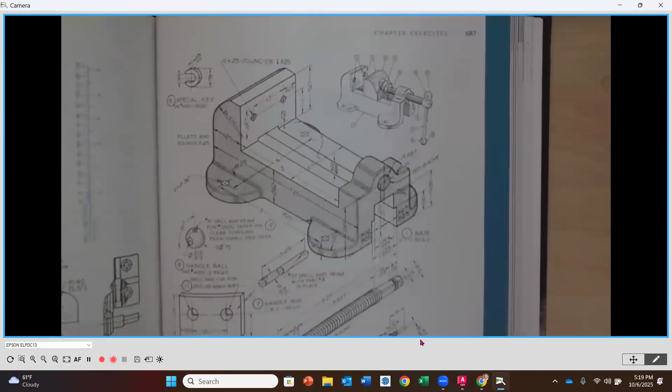And what we see here is kind of a pictorial of the full assembly up in this upper right-hand corner, and then all of the individual part details for each one of these here. Now you'll notice that this is all in isometric view, okay? And what you were tasked with last week in assignment 7A and 7B was making the detailed drawings for all of the individual parts here, okay? Using the dimensions that were here, but then also I had drawing guides for you to work through. And really kind of going off of those drawing guides to create the 3 views, the standard orthographically projected with good dimensioning for each one of those.

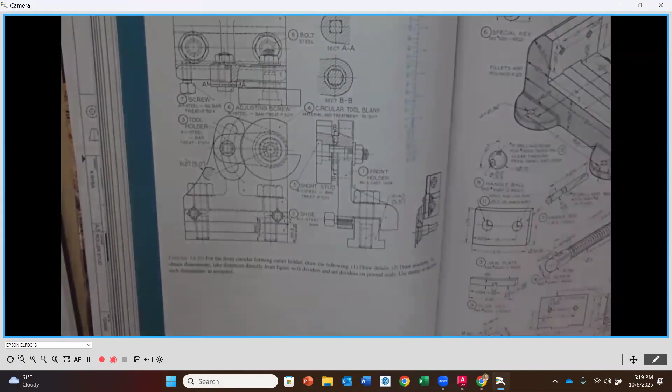So kind of peeking back at Module 7 and looking at assignment 7A and 7B, just reminding us of those individual parts. So the first part of this project would be completing those 2 assignments. So this is assignment 7A. There are 4 of the parts from that assembly in here. And if you click on any one of these PDFs, for instance, this is going to be the drawing guide. So you want to duplicate what you see here, making sure you're using the appropriate drawing border to the right scale, and then adding the dimensions to the part, drawing up the part, okay? And then doing the very same for the additional parts that are in here.

By the time you get done with the 2 assignments, you'll have 8 parts drawn, dimensioned, and on borders, okay? They're the individual items, okay? So once you have that done, then we go to the assembly drawing. So like I said, if you're not quite there yet, that's okay. I'm still going to do the demonstration tonight so that when you get there, you have some direction here.

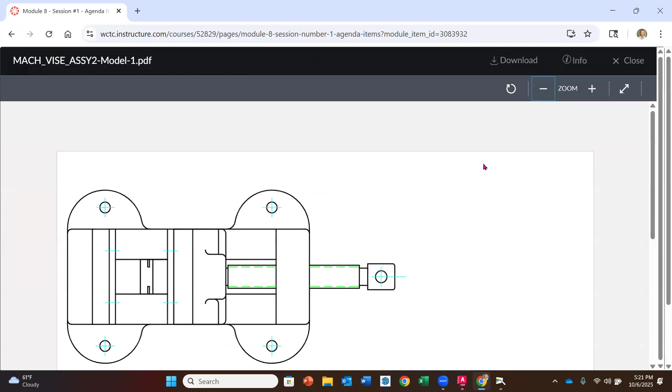So if we look at our agenda, first things first, you're going to use that page 687 in our textbook to kind of see those details. You'll also notice there are 2 other items here in PDF form, okay? The first one, this is kind of a larger view. I'm going to zoom out just a little bit of the 3 views of the assembly that you're going to create. This doesn't have the balloons on. This doesn't have the drawing border on. It doesn't have the bill of material. And I did that on purpose so that you could kind of see the parts a little bit better on here.

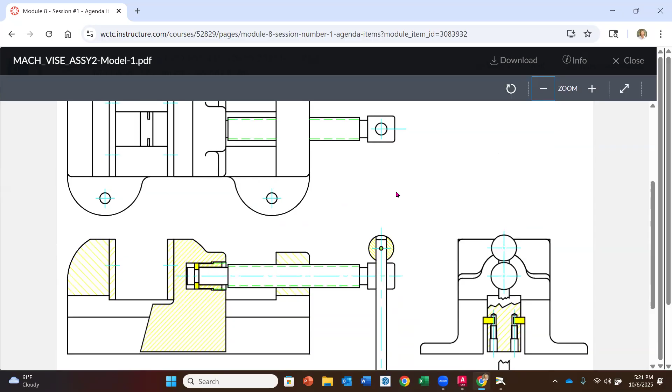I also kept this as color so that you could really differentiate from part to part to part. Okay. So this is something for you, for reference. I did print this off in the classroom in hard copy form, so you guys have that if you happen to be here, but for those who are virtual, this is just a nice close-up view of the 3 views that you're going to be creating. So if you need to zoom in, I think it's a little bit easier to look at this one.

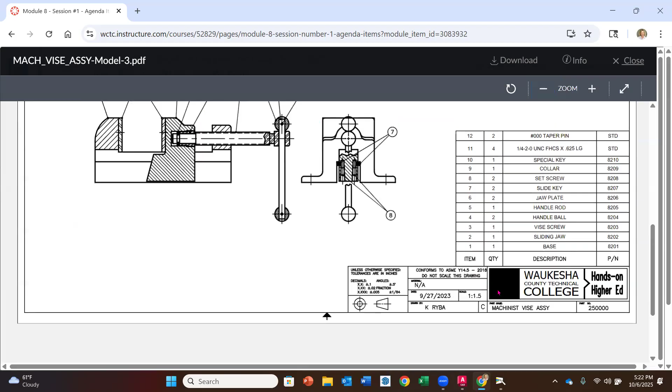The other one that we have here, the second PDF, this is the actual drawing guide for the final assembly. Okay, so this one is those very same 3 views, but now you'll notice that we have the balloons on, we have the bill of material over here, we've got the drawing border on, so that, like I said, if I try to zoom in on this, yes, you can, but it's a little bit grainier. It's a little bit harder to see the details. So that's why I have both versions. So that's what you see here in the agenda item.

And I'm going to show you how to get started on that, pull the borders in, give us some reminders, show you how to get the bill of material in place and balloons and all that kind of stuff. And then it says here, you're going to see the demo, use the parts drawn from assignments 7A and 7B. So again, if you don't have those done, that's okay. Just sit back and watch what I do tonight.

And then you're going to be submitting the PDF of the final assembly here. There's only one item that you're going to be handing in for module 8, and that's just the final assembly. That's it. Okay. And it's going to be based on that drawing guide. So it's going to be on a C-size border. You're going to balloon, you're going to section as needed. You're going to add the bill of material, and you're going to fill in the title block.

Okay. The assembly always goes faster than the details. The details are the slow you down stuff. And so the assembly, you're going to find, is going to go relatively quickly compared to all the individual details. So let's get started on this. I'm going to show you the process that you're going to go through and the items that you have to keep in mind as you go along that path.

So what I've done is I've already pulled open AutoCAD. All of my detailed drawings have English units or inch units, okay? So I opened up my WCTC inch template to get started here. And you'll notice that the generic drawing1.dwg is here. So that's where we start. Then what I'm going to do now is pull in the individual parts at a 1-to-1 scale, and then we're going to place the views that we need for each one of our parts, just like we did for that small assembly in the practice problems for module 7.

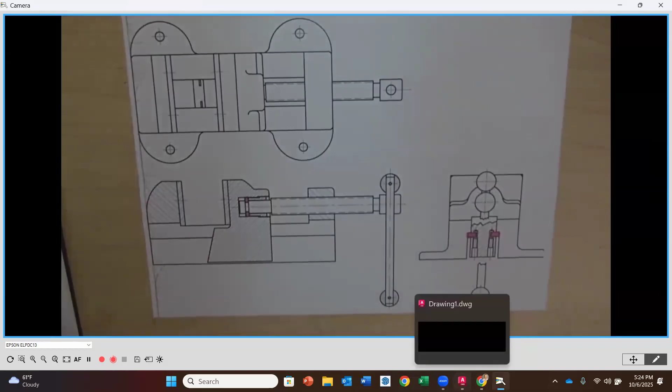So I'm going to go back over to AutoCAD, and just like I would for any part that I'm going to bring in, I'm going to go over to the Insert tab, and I am going to insert from block libraries. And I'm actually going to put the chat away for a little bit. Then over here, I'm going to arrow down and say browse block libraries. Now I'm going to go to the directory where I had saved all of my drawings for this project.

So depending on where you have your stuff, I have mine in my tech drafting, and then I usually go to module assignments. I have module 8. I have all the drawings in there. So you might have them in module 7, the detailed drawings, and then you're going to have the base. So I'm going to pull in the base.

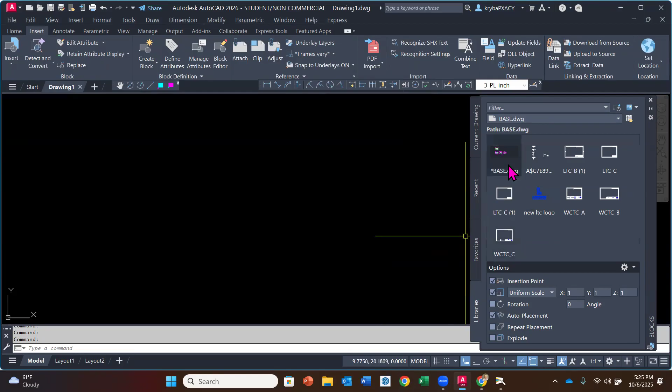Now this base is going to be dimensioned. It's going to be on a drawing border, and that's totally fine. We're going to bring that all in. Now you'll notice that it populates right here, and I'm going to left click, and I'm going to bring this in. Okay. Now, when I bring it in, remember it's a click, click, not a click and drag. I'm just going to place it anywhere on the screen, left click.

And then now it's asking me, what's the scale you want to bring this in at? So if you look down at your command line, it has 1 in the brackets. You can either input 1 or just hit enter, because that's usually what it thinks you're going to do. But if you want to bring it in at 2 times or 3 times... but remember, individual parts are always drawn 1-to-1, and we bring them in 1-to-1. Okay. We adjust the border around it, and we adjust the text size. Okay. But we always draw 1-to-1. So we want this in here as 1-to-1.

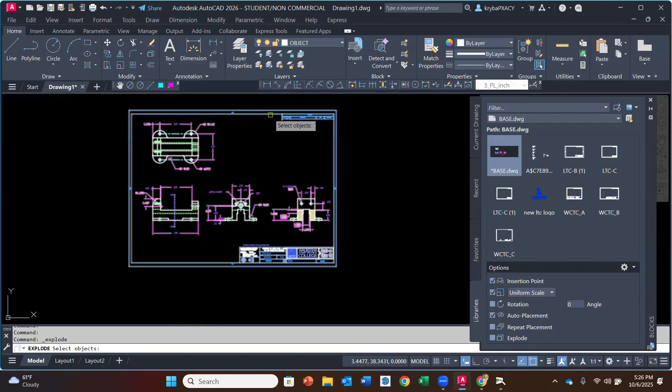Now what we want to do, first things first, if I go over the top of this, this is all one item. It brings it in as a single block, okay? We first need to explode that. So we're gonna go back to the home ribbon, and underneath our erase, we're going to click on explode, and we're just gonna select any line, and we're gonna hit enter. And now we have individual pieces. Our border will still be the same, but that's okay. Each dimension is separate and such.

Now, I'm going to go back to the drawing guide. So what you want to look at here is, what are the views that I want to save and use? And what are the things that I want to get rid of? Okay. So I'm going to do just the right side view because I just want this outside. I'm going to do the front view and the top view. That section view I'm going to get rid of. And then all of the dimensions and the border. So the section view we're going to get rid of, but we're going to keep these three right here, front, top, and right side.

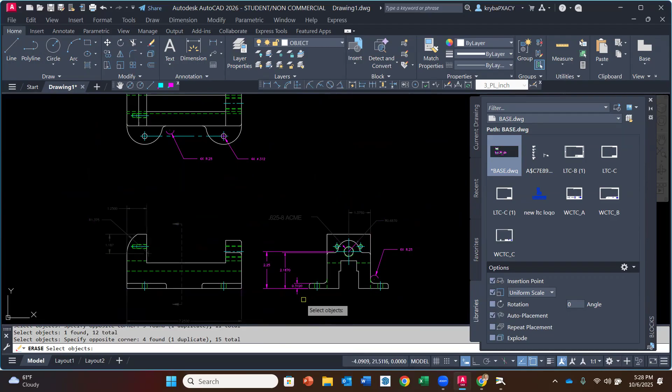So I'm going to zoom out a little bit. I'm going to go to erase, and I'm going to kind of strategically get rid of the things that I don't want. I also like to delete the dimensions. You could hide the dimensions if you want, but remember, then in this file, you're always saving information that you're not going to reference. So I do like to get rid of it. So I'm going to take the time to delete all of this stuff. I can't do two things at once. There we go. Oops, a little bit more. Okay. So it looks like I've got a couple little residuals here. Get rid of those. And I think for the most part, I've got my three views here.

So now that I've got this in, I'm going to do a file, save as. Just keep saving as often as you can, you don't want to lose what you have. And I'm going to go to my OneDrive, mechanical design, tech drafting. There we go. And I'm going to call this machine vise assembly. And I think this is like number 3 at this point. There we go. Okay, so this is my start.

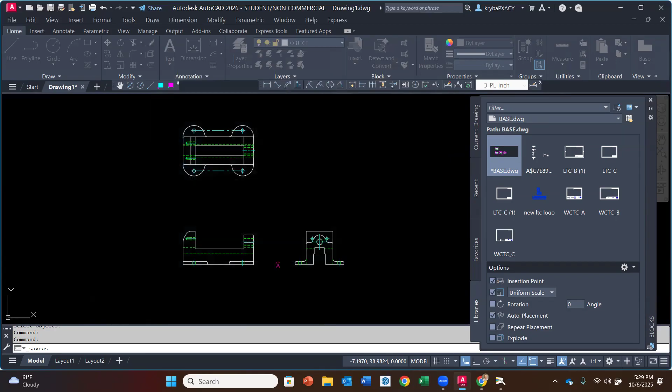All right. Now what I want to do is go back and compare here. What are the things that I need or don't need? So as we look in the right side view here, we're going to be putting our sliding jaw in place. So when I look in this direction, I am not going to see the 2 holes that are here. So you'll notice that we don't see those in that view. So I'm going to get rid of those right away. And then any hidden lines for the most part. I am going to be switching a couple of these to visible lines so that I can use those.

But in an assembly drawing, we leave out the hidden lines and most of the center lines too. Again, we just want to show the items so that we can balloon to them or show where they're at. So in this view right here, I am going to get rid of the hidden lines that I see in this view.

I'm in the right side view right now. I'm going to get rid of this line. Oh, this one's a solid, yep, in this view. I'm going to get rid of the two holes here because that's going to be a different part, and then get rid of these two right here and right here. Some of these are going to convert.

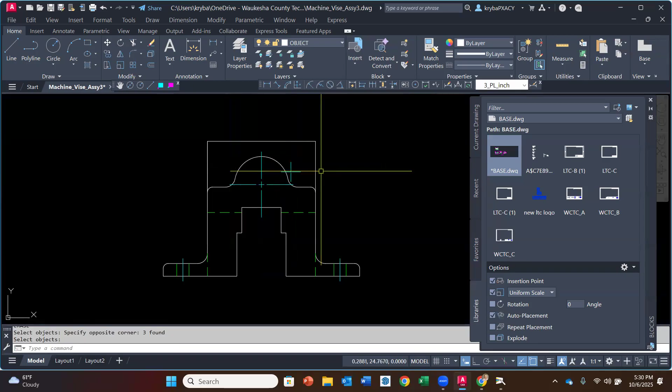So we're just going to clean up where we need to. And then this line and this line go to solid.

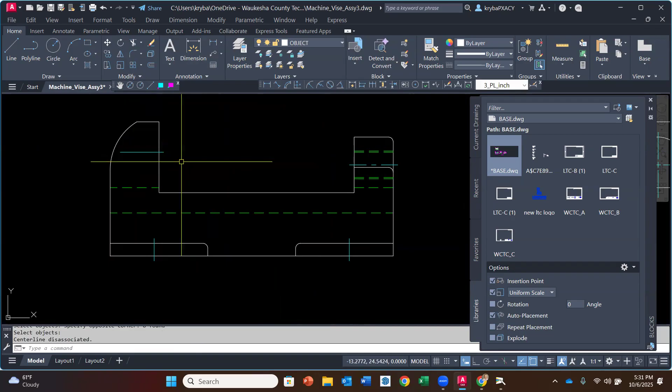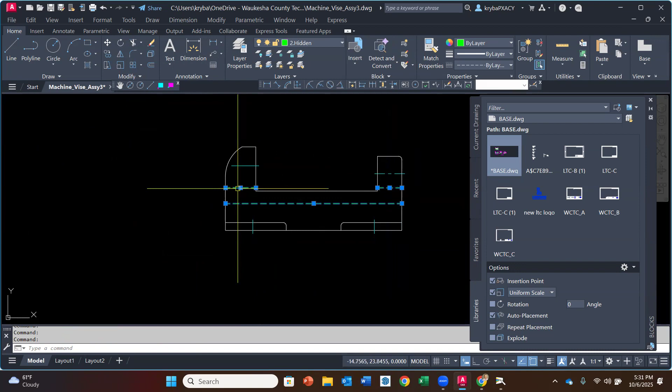And then we're going to do the same thing over in the other view. Any of our hidden lines, we're either going to get rid of, or we are going to convert to being solid. This hidden line for the tapped hole, we're going to get rid of that one, and then over here as well. I am going to keep the center line. This one is not going to be seen because we do a section view, as we can see on top. And then this one goes to, these three go to object lines, okay?

And then we do the same thing in the top. So I'm going to get rid of these two center lines, get rid of hidden lines, this one, and over here.

Once we get rid of what we don't need, you'll notice it starts to look kind of generic. And that's good, because if we kept all of the hidden lines and all the little individual things, it starts to just look like a bunch of black lines because they go over the top of each other and it's too much.

So this is going to be our first part. I'm going to do a quick file save. If I'm forgetting anything, remember, always reference back to here. This is your final, so if in my lecture here I forget one or two things, this is what you're going to be working off of.

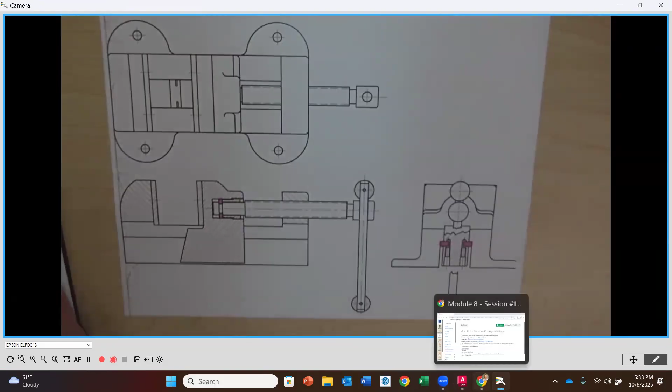Okay, so I believe I'm pretty good on my base right now. Then the next part that I'm going to bring in is going to be my sliding jaw. So I'm going to go back to AutoCAD. I still have my dialog box open for the insert, so I can just arrow down and go to Browse Block Libraries, and it should bring up that same directory that I had gotten my other items out of. And this is going to be the sliding jaw, okay, the sliding jaw.

So I'm going to open that up. It's going to populate here. I'm going to left click and pull it in. Again, I'm just going to kind of fit it right here. This is going to be a scale of 1 to 1.

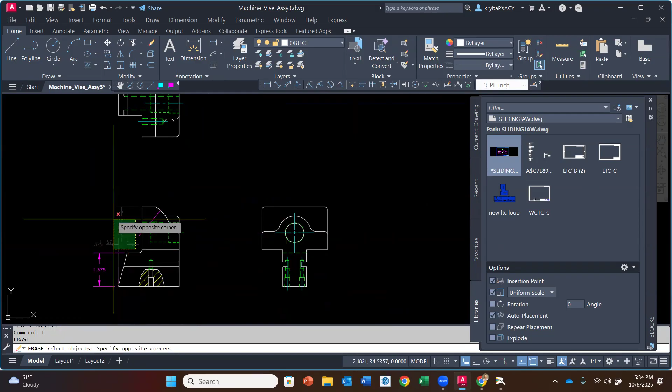And then now I am going to explode and get rid of what I don't need. So I'm going to get rid of my border, any dimensions, the section view. I'm going to keep my top view, but I'm going to get rid of all of my dimensions. Do a quick save. All right.

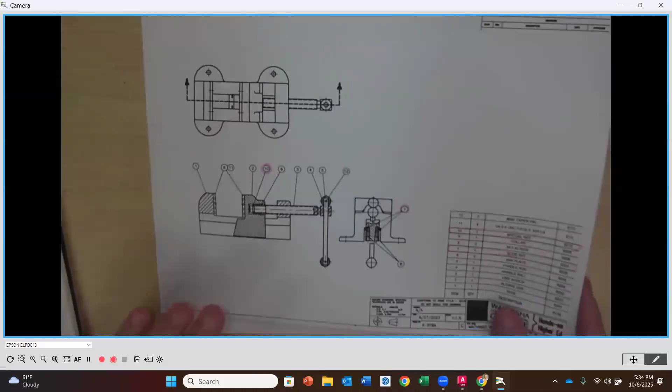Now, as far as what I'm going to need, if I go down underneath here, we don't see the section view or the section lines here, but in our assembly, we do a full section in our top view. We go right down the middle here, so our front view in our assembly ends up being a section view. The parts that are sectioned are parts that we are actually physically going to be cutting, and we're going to go right down the middle of our sliding jaw. That's what this profile is right here. So I am going to put that in place first, which is this view right here.

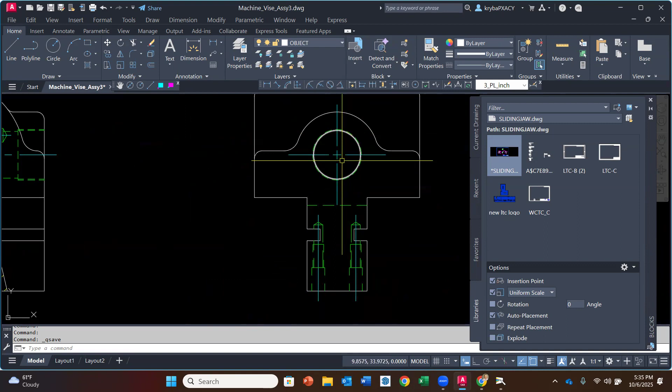Now, before I do that, I'm going to get rid of some of the things that I don't need. These two counterbore and threaded holes, they are on either side of the center line that we're going to be doing the cut down, and there's another place where we can see those. So we are just going to completely get rid of these lines.

These two lines, this one, and then I'm going to get rid of the threaded hole here, but we are going to convert this bore here, these lines, to object lines, okay? So I'm going to just select each one of those and put them on the object line layer, okay? All right.

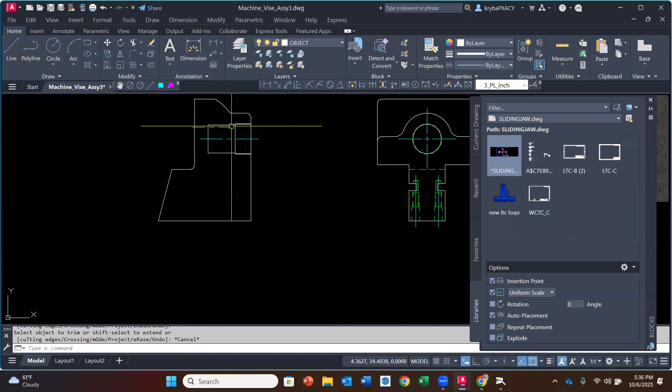Oh, and then lastly, I've got this little curve coming down in here. I can get rid of these items and then trim this to there so that we have that. It looks like there's a little residual point here, so I'm going to get rid of that one. Okay, so now this is going to be what I put into my front view.

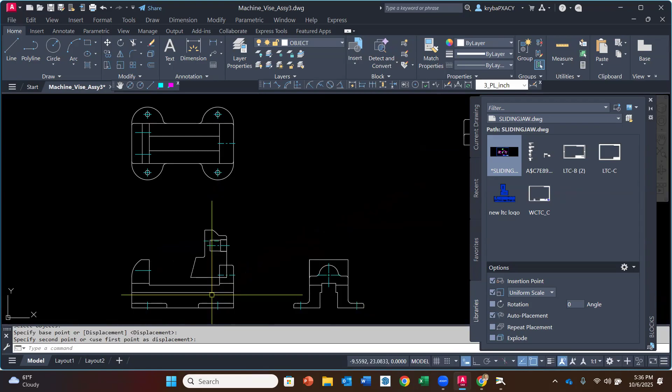So I'm simply going to move it. I'm going to kind of move it down here first so I can get it close. Now this center line right here and this center line right here have to be in line with one another, okay?

But I want to place this kind of in the middle of the base-ish, okay? It doesn't have to be perfectly in the middle. I didn't measure this to be perfectly in the middle, but I have it placed in the middle here, so we can kind of see this lead screw into the part, but not at either one of the extents. So I just want it right about there. Again, you don't have to be super exact, but I need this center line to be in line with this one. So I'm going to move this.

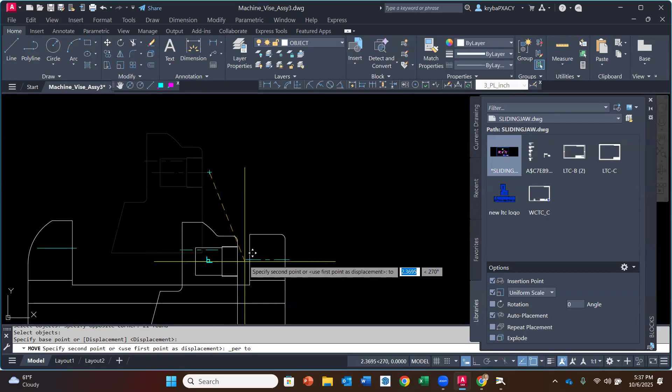And I'm going to go from this endpoint, but I'm going to go perpendicular to the center line down here. So now they're in line with one another.

And now all I want to do is get rid of the lines that I don't need. So I'm going to trim away the middle part here, this one. And then, oh, I just noticed these feet wouldn't show. So I'm going to get rid of these guys because these would actually be hidden lines in this view. So I'm going to get rid of these right away.

And I think that looks pretty good. I'm going to wait on doing my crosshatch - we're just kind of putting these in place right now. All right, so there's that part.

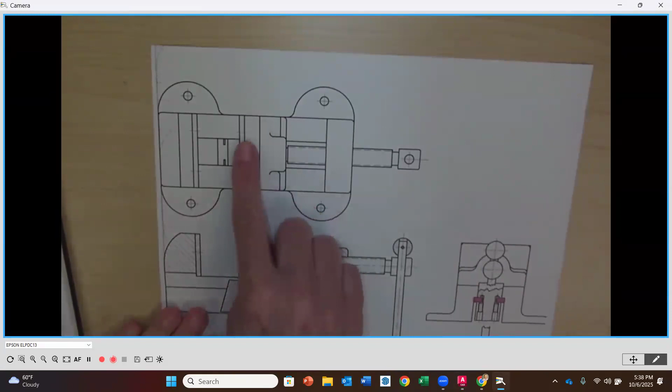Then as I look underneath, I am now going to position the top here, so this is in line with my part right here. So I'm going to position this in the top view.

So I'm going to go back to AutoCAD. I'm going to find my top view here, and I am going to move this kind of over here. All right, and then I want to get rid of - you'll notice that I do not see any hidden lines in that top view.

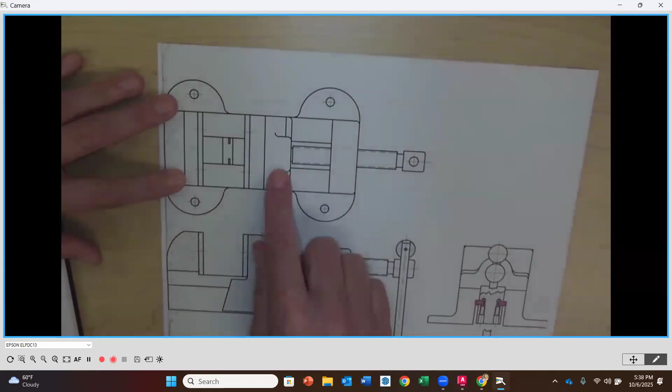So this is the start of that sliding jaw. There's no hidden lines in here, so I'm going to get rid of them all.

I'm going to leave the center line in for where it is going to line up with the other parts. But as far as anything else, it's going to look just like that.

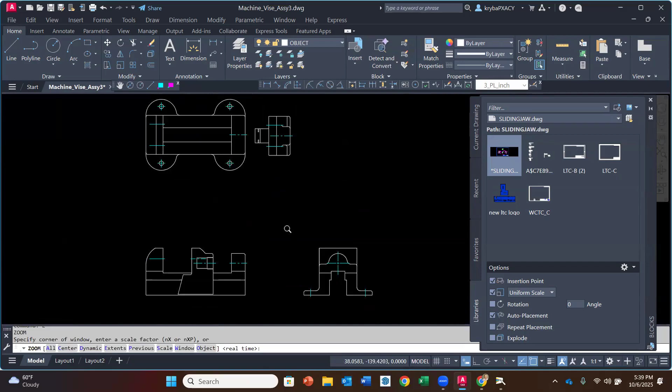And then now I want to put it along this center line, but in line with the front side. I'm going to use the front side. Oopsie, sorry - I have one of those mouse pads that if I hit it, it kind of is sensitive.

So I'm first going to move this in line with the center here. I'm going to go perpendicular to this center. And then I'm going to draw a line from the front, and I am just going to make it ortho right there.

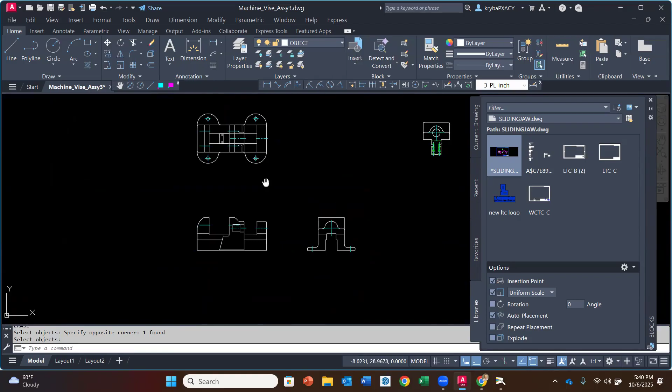And then all I'm going to do is move from the intersection right here to the perpendicular to that line that I just created, and then I can now delete. So all I did was draw that line in there so I knew where the front of this was. So now this is in line with the front.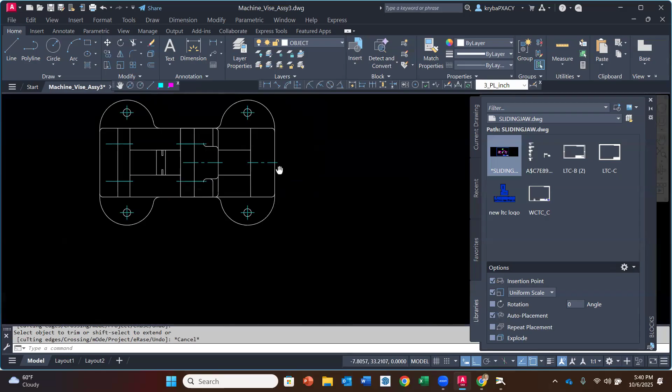Okay, so that is the top. And then I can get rid of - I can trim away the line in here and the line in there. I think that looks correct. There we go. So again, no hidden lines, kind of keeps it nice and clean. Okay, I'm going to do a file save.

And then the last part I have to put in is going to be on this right side view. So I'm going to bring this down closer to where I want it to be. Turn ortho off.

It's going to be somewhere in here, and this center of this hole is going to line up with the center here. But I'm going to get rid of this hole, because if I look back underneath here, this circle is looking in this direction at the end of my lead screw. So these two circles representing the threads, I am not going to see in that view, so I'm just going to get rid of them.

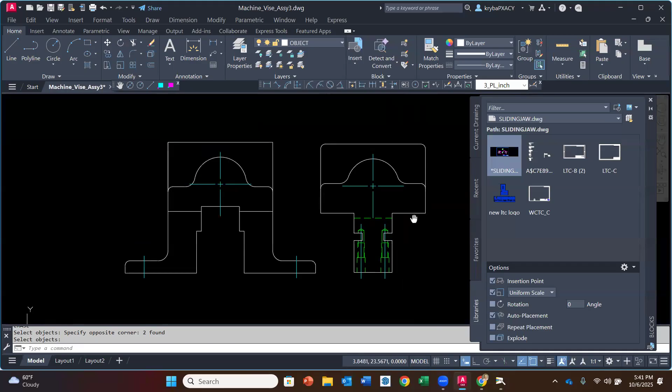I'm just going to maintain the center mark for that, and then get rid of the other hidden lines we see here, this one going across. But I am going to keep the counterbored threaded holes, and those are all going to change to visible lines because we're going to section back to those.

So I'm just going to select all of these with a window, and we are going to put those on object line number 1. Now those are all object lines. Now all I'm going to do is move this entire view.

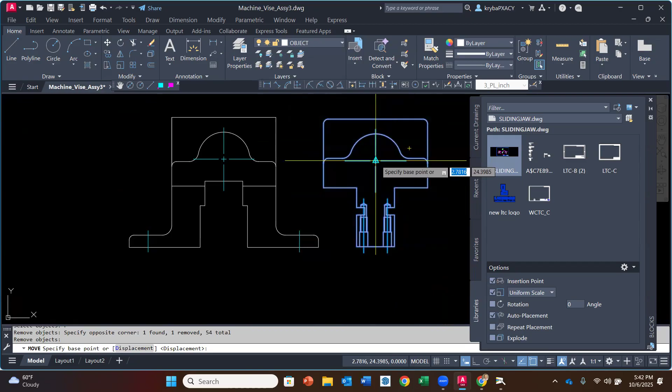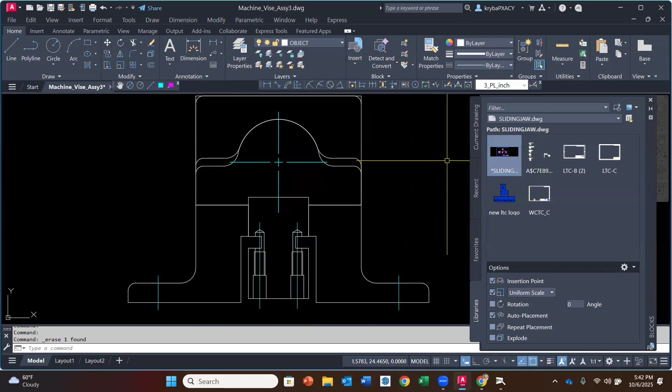From this center to this center, and that's it. Now, something I'm not going to take the time to do here is there are multiple lines on top of each other. I expect you to remove those. For instance, there's another line, same width. If I delete this line, there's still a line underneath there. My expectation is that you go through, and as many lines as you see on top of each other, you remove them. Again, I'm not going to take the time to do that here, just for the sake of your sanity watching me do AutoCAD.

So now I feel like I have my 3 views for my sliding jaw in place. I'm going to do a file save-as, and as you can see, you continue to do this for each one of the parts. You bring it in, explode it, save the parts that you need, get rid of the parts that you don't, and then place things. Again, using the drawing guide, this is going to be your final result, making sure you understand where each one of these parts go and how they are represented in the assembly drawing.

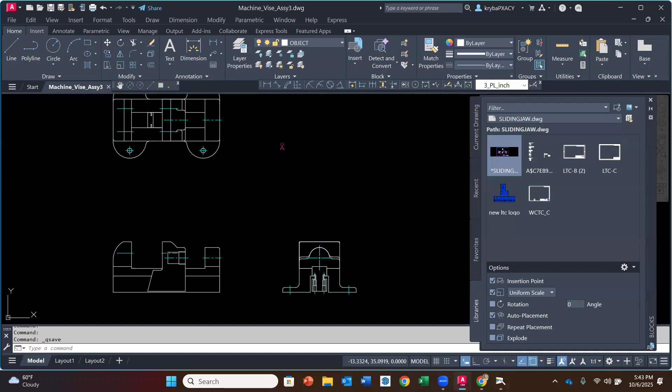I do want to talk about this little section right here and a couple others individually. So what I'm going to do now is abandon pulling any more parts in individually, but I do want to bring up the part. This is the part that doesn't have the balloons on it, so I want to show you some things here as you're putting things together.

As I stated earlier, we don't put hidden lines in an assembly view except for one exception, and that is when we are representing threads in a simplified form. So the only hidden lines you see here are on our lead screw to show the minor diameter of that Acme thread. You would represent that in the detailed drawing just as we see it here, but we maintain the hidden line so we can see that it's a threaded feature in our assembly. Does that make sense to everybody? Okay, so that's why we see those here.

Now I want to show you this little area right here. When we show our lead screw in here, you're going to bring the lead screw in first, and before you place it in here, you are going to put the collar on it. I want to do that for you so you can see that process.

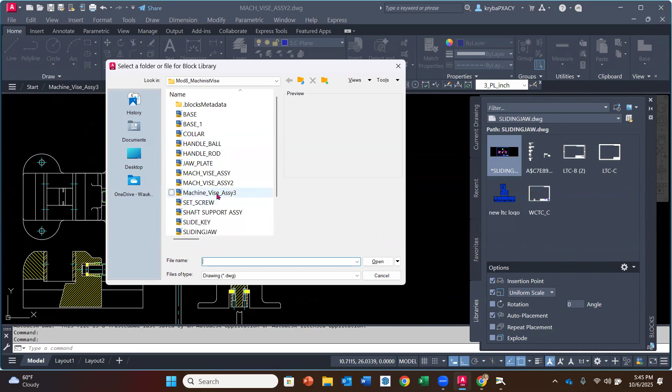So even though I have it here already, I'm going to browse block libraries. I'm going to bring that lead screw in. I think it's called the lead screw. What is it? No, it's the set screw. What's that called? I thought it's called the lead screw. Vise screw, it's called the vise screw. That's why, not the lead screw.

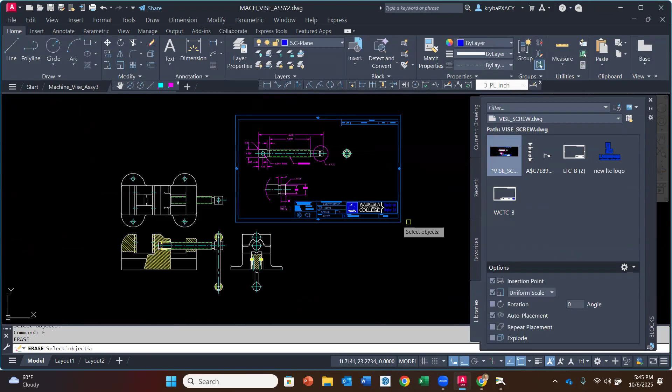Open, okay, so it's in here, I'm going to bring it in. Yes, I'm going to redefine it. That's fine. So 1-to-1, I'm just going to explode this, get rid of this. I'm only going to see my view here. And I'm just going to mirror this, and I do want to erase the source data. Now, this is my lead screw I'm going to pull in.

The next part that I want to pull in before I place it in the base is that collar. So the collar, I know I already have that here. I'm just going to pull it in a second time. I just want to redefine it. That's fine.

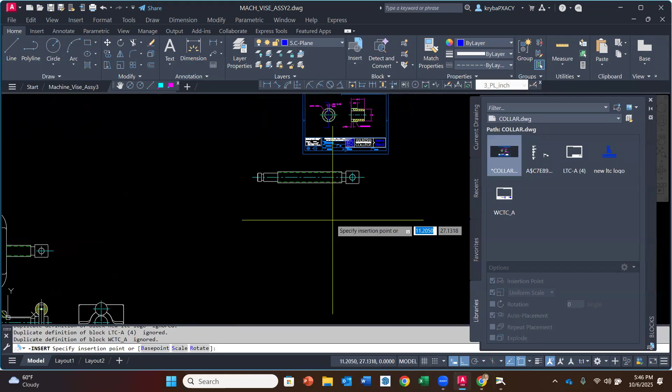Here. All right. And I'm going to, again, going to get used to exploding and deleting here. I'm going to get rid of this too. Okay. And then I also have to mirror that so it's in the right orientation. The threads are going to go to, if you would, the outside. Erase the source data.

Now, how you want to line this up. This center line is going to be the same center as our lead screw. So I'm going to move... vice screw, sorry. This from here to here, okay, just so that they're in line with one another. Now, I need to place this along here. You are going to line up this front edge right here with this edge right here on the vice screw.

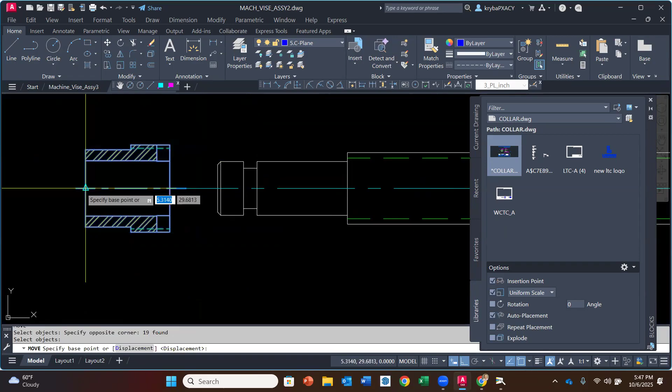Okay? So I'm going to move this, and I'm going to go from this intersection right here to this intersection right here, okay? Right there. Okay, don't line up this edge on the outside. Line it up right here, okay?

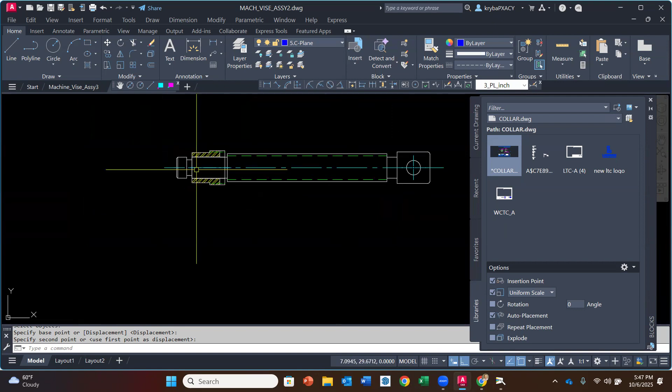Then what we're going to do is now we're going to place these two items into the assembly, okay? And we are then going to put the front edge here to the bottom of that bore in our sliding jaw, okay? So I'm going to move this whole thing, and I'm going to grab the front intersection right here, the very end of that vice screw right here.

And we are going to go down here. I'm not going to place it, but you're going to place it right there. You see that? It goes to the bottom of that bore. So place your collar first here, and then bring this to, let's see, come on. Bring that to the bottom of the bore.

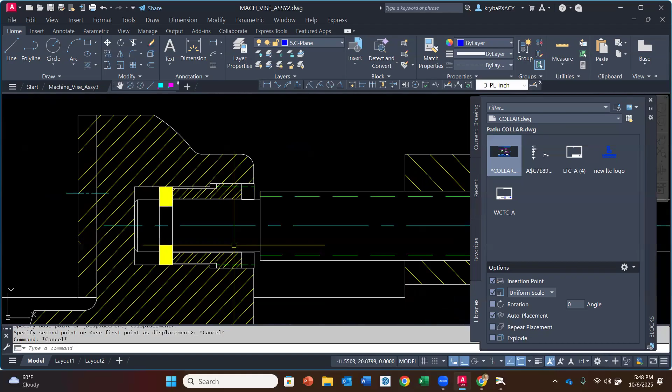So our collar, you're going to see, the front edge of it is just outside of it. And that's totally fine. Okay. That's no problem. This collar is adjustable. So you can put it in further or you can pull it out. But we are aligning it with that front edge right here of that groove. And then the front edge of our vice screw goes at the bottom of that bore. Okay, so that's what I wanted to show you there.

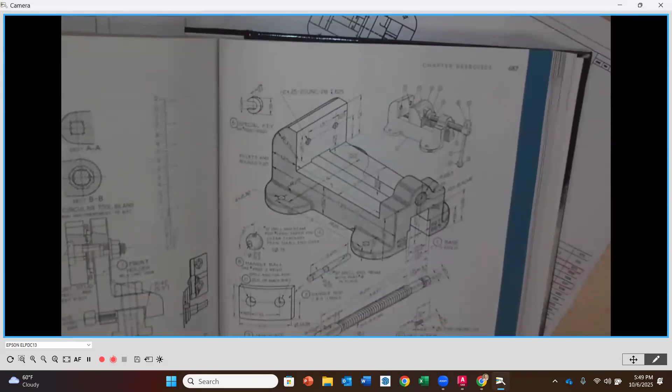Now, additionally, you're going to notice that we have these two squares here that are solid. This is what we call the special key. You guys didn't draw this in 7A or in 7B. It is such a simple part. I'll show it to you. It is in our book. It's right there, okay? And all that does is it just holds that in place while it's inside of that bore, okay? So I didn't feel it was necessary to really create it.

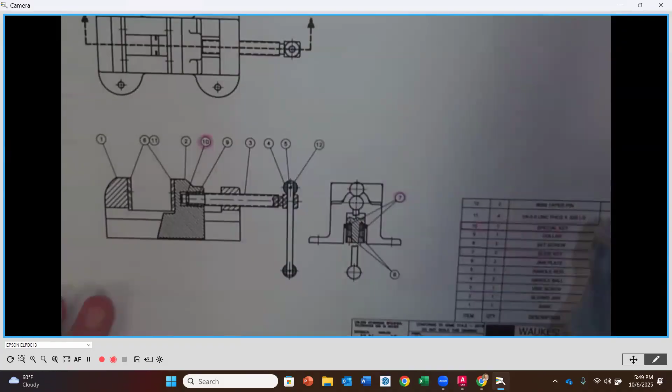So all we're going to do is we're going to represent it in the assembly, and you're going to put it in the bill of material. And that's what part 10 here is. And you're going to notice it's called the special key. You're going to represent it in the assembly, but you're not creating a detail for it. So if I go back to AutoCAD here, to represent it, this is all you're going to do. You're going to make this a rectangle, and you're going to hatch this in as solid.

That's it. So if I delete this out, all you're going to do is create a line right there and right there to close it in so you have a rectangle all the way around here. And then you are going to change this to your hatch. You're going to go to the hatch function. You're going to make sure it's set on solid. You're going to click here and you're going to click there. And now it's in place.

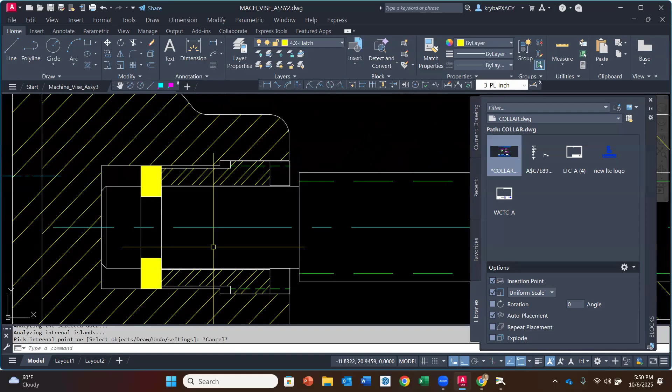So you're not going to have a part to pull in for the special key. And you're not going to be creating a detailed drawing for it. You're just going to represent it here. And I'll show you when we balloon it how we represent that. Does that make sense to everybody? Okay. The same thing for the pin.

There is a pin that holds the balls on the end of our handles, okay? This pin goes in there, okay? So if we look at the detailed drawing for the handle balls, you do make this part. I'll go back underneath, okay? That is this part right here. This hole is going to be the hole for the handle rod, the larger hole. The smaller hole is a pinhole to keep the ball in place.

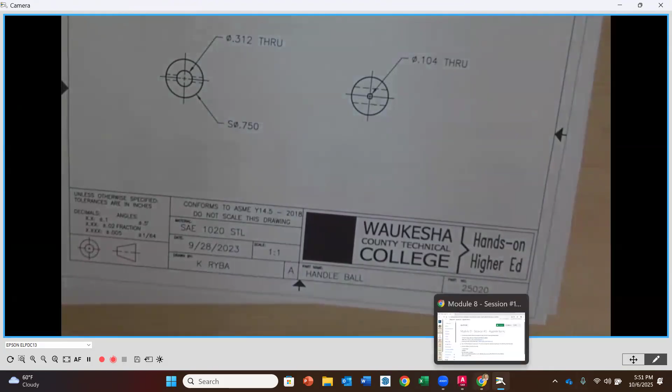Here again, we are not drawing a pin, okay? We are just going to represent it in the final assembly, and we are going to balloon it, and it will have a bill of materials slot, okay? So here you're going to notice on that ball, where the pin would go through, we hatch that in as solid as well.

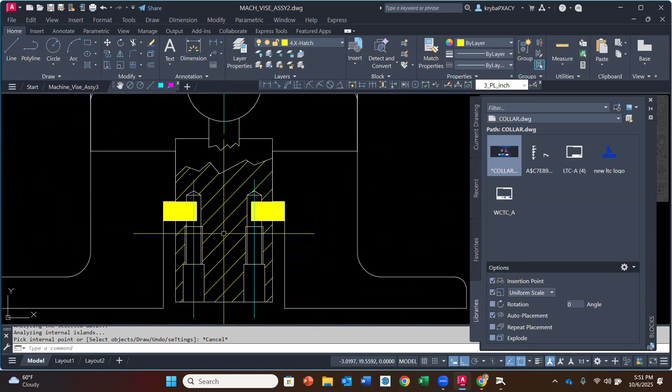Okay, we hatch it in solid just because it's a small part. That's what we do with small parts. We just make them solid, okay? And then the third part of four that you draw in the assembly, but you don't make a detailed drawing for, is called the sliding key, okay? The sliding key fits into the groove on the sliding jaw.

So if I go like this, if I delete this out, all you're going to do is create a horizontal line to connect across here. The sliding key on either side fits right in here, okay? And then once you have that as an enclosed rectangle, you're now going to go to hatch. You're going to go to solid again. You're going to click here, and then you're going to point to this.

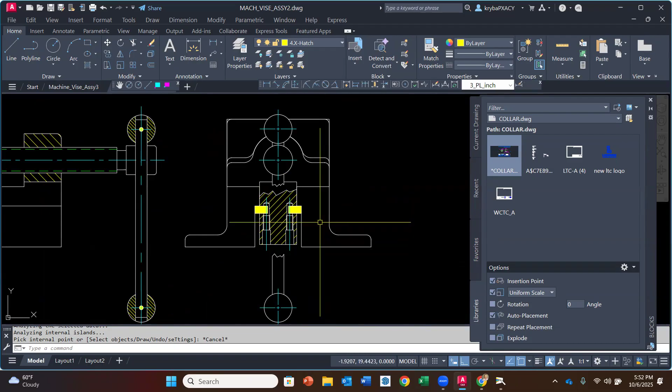Oops, the insides too, sorry. Goes here and there, just a little bit past that center line. And now that is going to be what you use to represent that sliding key, and then you can balloon it, okay? The fourth part that you're going to have on here that you will not draw, but you'll have a balloon for it, you don't even represent it. That is going to be the flathead screws that keep the jaw plates on either side here.

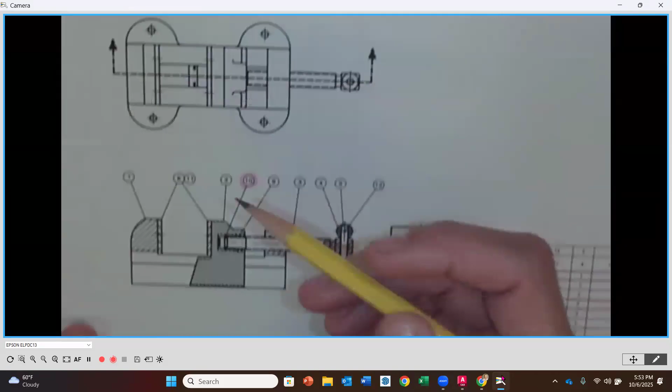The reason we don't represent them, number one, let me go back underneath here. Our cutting plane line is going through the part, right? And the center lines for those two flathead screws that are going to hold that in place, they don't even go through there. So when we look at our plate here, this one again is a little bit easier to look at, all we see is the center line, okay? So we do not show the fasteners in our assembly.

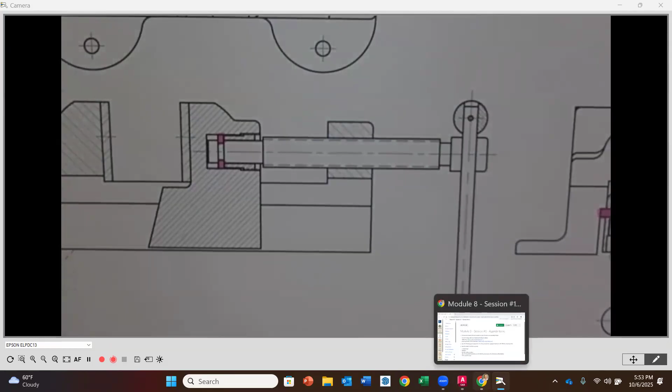Now, a rule about sections on assemblies. Number one, you want to represent all of the parts so that you can see them, except we never section solely for the purpose of showing a fastener. Does that make sense? It's a standard piece of hardware, so we don't section for that. When we see a handle like this and how the ball goes on it, that's different, okay? We want to see how that's working together. Or this area here where we've got the collar and the special key, we want to see those internal pieces.

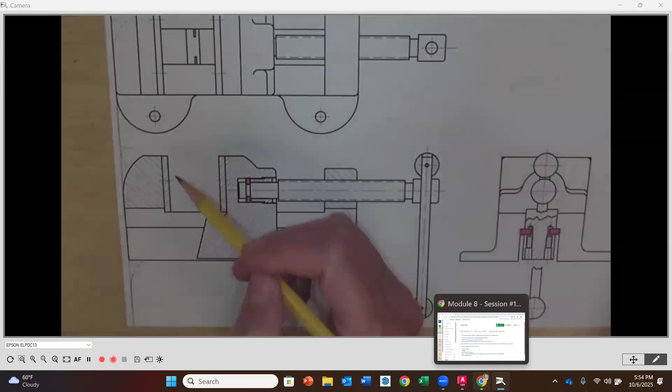But to put a section intentionally through a flathead screw, again, a flathead screw is a flathead screw. It's not anything super special to see orientation. So what we're going to do then is we won't represent it. There will be a line because we need it on our bill of material when we put this together, but you're going to notice that we have it as a little stacked balloon as we see it here.

So number 6 is going to be the jaw plates. And then right next to it is number 11. Number 11 is that flathead cap screw, okay? And there's going to be 4 of them, 2 on one side, 2 on the other. And we just show it right next to it because you're going to attach number 6 with number 11. Does that make sense? Okay. So that's how we show that.

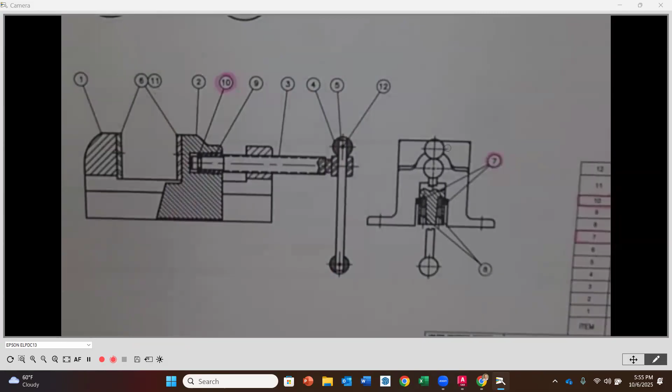So if you're like, where's the flathead screw? We just don't represent it because we don't have to. We don't section for hardware like that. Okay. I think that's the only stacked one that we see. So questions so far, looking at this? And again, I think this one's just a little bit easier to look at. You can see more of the details. Okay.

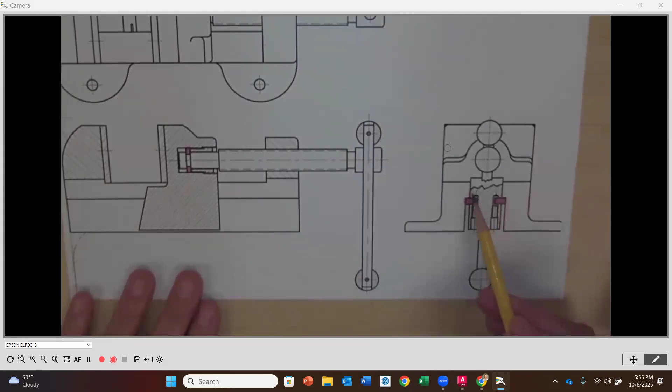Now, sections: we have a broken out section right here so that we can see the 2 areas in here, okay? And so that we can also see that sliding key, the most internal part, which is going to be solid. Then we break the handle, okay? If we were looking in this direction, that handle would be going straight down, and we wouldn't be able to see this area on the back. So we literally break the handle so that we can see this chunk on the inside. Totally legal, okay?

Now, the other part that we don't show in here, but we kind of do, is that set screw that would go up into these threaded holes here.

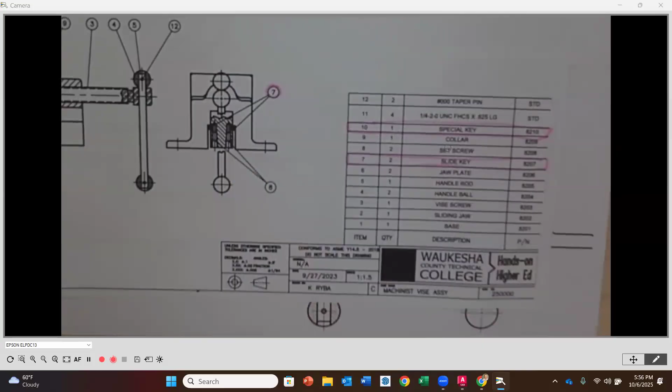We don't put them in because, number one, they're just going to be over the top of those threads. When we threw them in, they're the same lines. So if we would put them in, we would have line on line on line. So again, you're going to notice that we balloon to those, but we're not showing them, we're not pulling them in as separate parts. Okay. And again, just because the lines are there and they would be on top of each other. So the set screw too, you don't have to pull in, but you will be ballooning it.

Okay. So let's look at the balloons and how to pull those in, and how to place those. So first of all, before I balloon anything, I'm going to open up my assembly. Before I balloon anything, I need to pull in my border. Remember, I have to pull in my border because I'm going to have to know what is the scale that I am going to be setting my balloons at and my text.

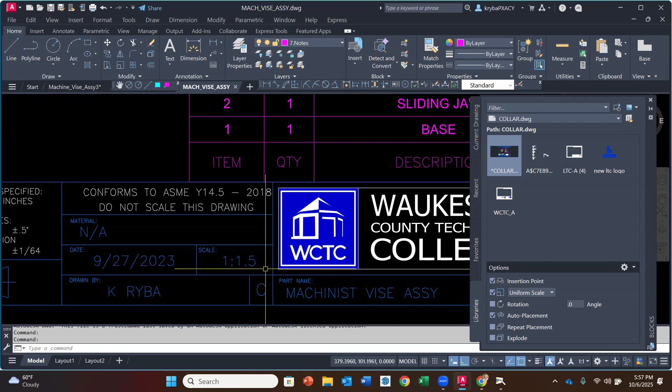So you'll notice here that I used a C-size border and I pulled it in 1.5 times. So when it asked me what the scale is, I put 1.5. I didn't put anything else. So 1.5 will fit around my views. You might have to pull these a little closer to each other.

Now, once I have my border in, then I'm going to be adding my balloons. Remember, your balloons go on your notes and dimensions layer. And you need to set up the balloons the same way that we did when we did our practice problems. That's why I want to go over it for you, because we only did that really once. So we're going to go to the annotate tab. Down here by multi-leader, we're not going to click on that yet, but we have to set up our balloons. So I'm going to set this to standard.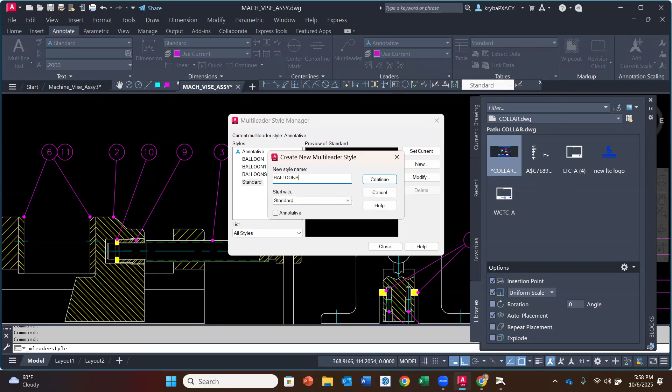We're going to go to that little arrow where leaders is, and I'm going to click on standard. I think that's the one that we did last time. We're going to hit standard and we're going to say new. And we're going to call this balloons. Just call it balloons. And you're going to say continue. I just need something new to call it. Then we're going to start with the leader format. Let's go in order here.

So leader format tab. We're going to keep the type as straight. This is going to be by block. We want to switch that to by layer, by layer, by layer. So if anything is by block, just like dimensions, we're going to switch it to by layer so it goes on the correct layer. We're going to change our arrowhead to dot from arrow, and we're going to change the size to 0.06. If it's anything bigger, it looks kind of obnoxious. And then the leader break is going to be 0.125, which I believe is the standard.

Then we're going to go to leader structure. We're going to leave the maximum number of points as 2. And then we're going to click off automatically include landing. We don't want a landing on a balloon. And then we're going to go down to scale and click off annotative, and we want to put the specific scale as whatever we pulled our border in at. In this case, it was 1.5. So I'm going to change that to 1.5.

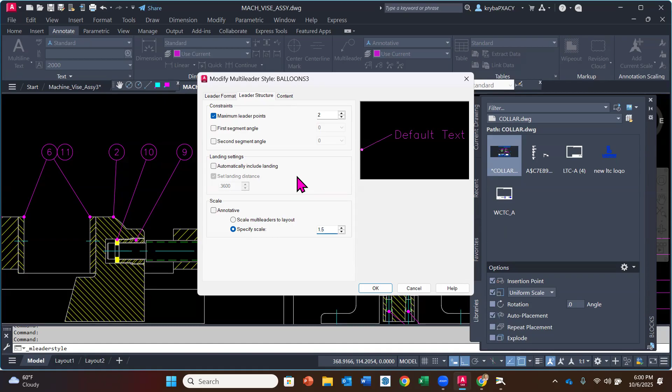Then I'm going to go to content. We need to change from MText to block. Source block is going to be a circle. From center extents, we want to change it to insertion point, and then we want to change the by block to by layer, and then the scale again to 1.5. And that should be it. Then we're going to hit OK, and then we're going to say set current. So your balloons will then be the current style for the leaders, and then we're going to hit close.

So now to place a balloon, I'm going to click on multi-leader, and I'm going to just select wherever I want to place it. I'm going to turn my ortho off, and then I'm going to left click where the dot would be, and then right click where I want my balloon to be, and then I'm going to put number 1, and then number 1 is placed. Now, how do you place something like this, the 6 and the 11? I'll show you how to do that. I'll just delete these out of here.

Okay, so I want to now identify my number 6 there. So I'm going to do my multi-leader. I'm going to click on my first one here. In this case, these are in line. You don't have to be in line, but I did all of them in line. My 6 is going to be my first one.

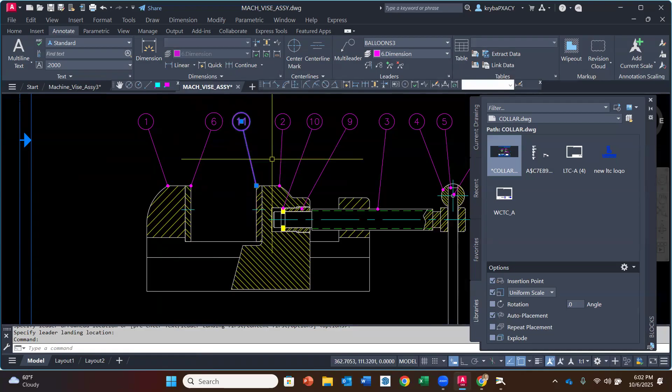Okay. Now, if I click on this balloon, it is all one. What I want to do is separate the circle and the 11 from the rest of the leader. So I'm going to explode it. I'm going to go back to Home. I'm going to explode that leader, enter. And now notice what happened.

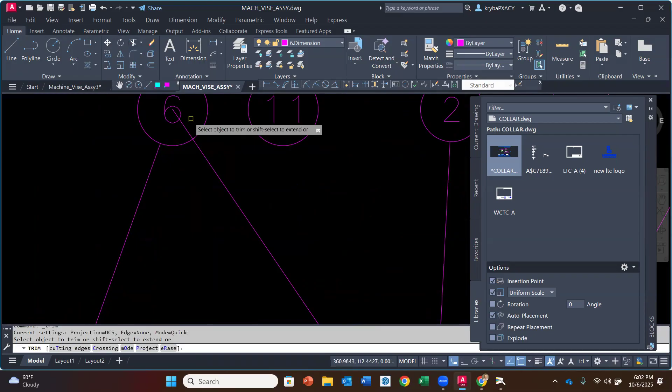The endpoint of that leader went to its center. I am going to left click that. I'm going to take that center and put it over here on the 6. And then I'm going to use trim so that it's not going to the center of 6, but it goes to the outside.

Now, something about a leader is that it has to extend to the center of where it's coming from. So if I do an undo here, and I move this and put it, let's say, to the endpoint there, that's not okay. You see how that looks kind of funny? We want it to extend into the center.

So I'm going to do an undo here and grab it again, left click a second time, and then drag that grip over. And now I can just trim to the inside and now it's properly placed. Now that 11 is floating there. That's okay. I can move that.

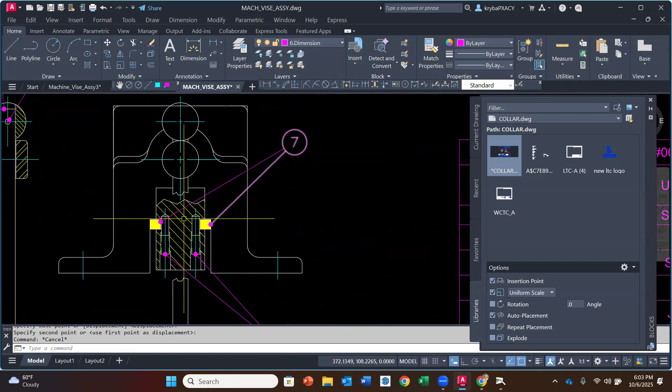I can select the 2 of those. I'm going to go from the quadrant to the quadrant. And now those are what we call a stacked balloon. Now you're going to notice that there's another place where, in this case, the 7 has 2 spots, and those are those 2 slide keys.

So all we have to do here is... oopsie, that was the 1. You place the 1 and then you're just going to create another. I'm going to go back to Annotate, multi-leader. I'm going to grab that corner and put number 7 right about there. It can be whatever number because I'm going to delete this one.

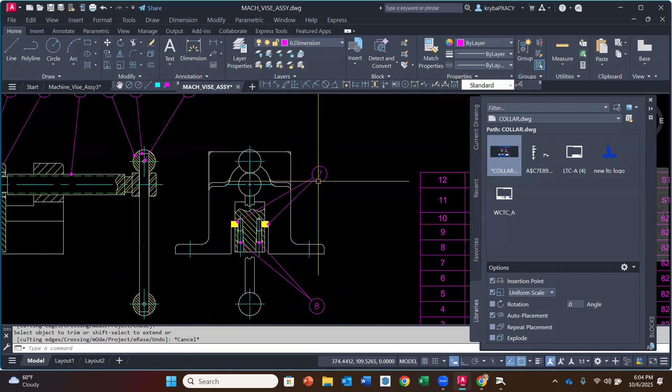And then I'm going to go back to Home. I'm going to explode this, but this time I'm going to get rid of the 7 because I don't need the second number. Does that make sense? Then I'm going to go to this endpoint, go to its center, and trim back so that it's in line with the center. And then the same thing for number 8. Is that helpful?

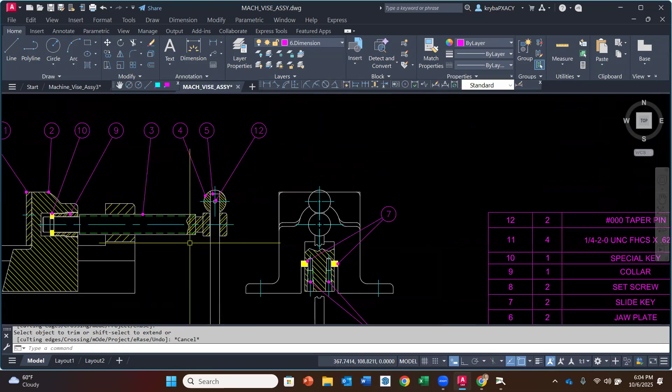All right. So that's ballooning. Any questions on ballooning at all? You guys know how to place your cutting plane line, so I don't think you need help with that. And I already showed you the hatching. Just be sure that when you hatch, things that are together with one another have a different hatch style and, if possible, a different angle.

All right. And the last thing I want to show you is how to pull in a bill of material. To do a bill of material, we want to be on our notes layer. It's really not dimensions. And we're going to go to that Annotate tab.

On the Annotate tab, you'll notice that there is a Tables function about 3/4 of the way to the right on the ribbon. So I'm going to click on Tables. A dialog box should come up.

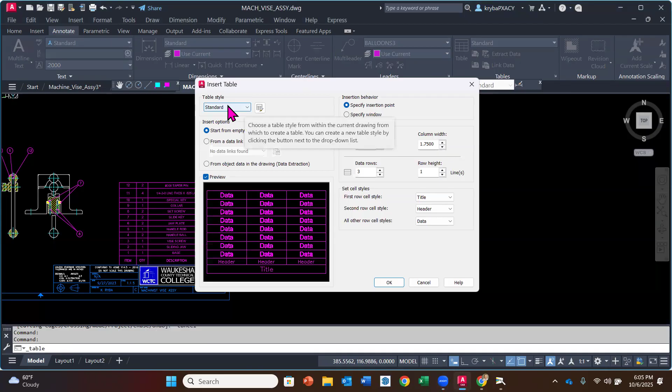We're going to leave this at standard, specify from an empty table. And really the place that we want to go to is right in the middle here. Now, our columns are going to be item, quantity, description, and part number. I think when we did it for our practice problems, we just had 3 columns, but we're going to do 4 for this one because we're going to use part number. Okay. So number of columns is going to be 4. Column width, again, 1.75. We can always adjust that when we create it.

Now, data rows. Remember, there's a title and a header row. We want these all to be data rows. Otherwise, on a bill of material we technically have a header at the bottom, but they do it out of order. So then the first two lines are going to be the header and the title. So then we have to have an additional however many lines. So I think that's going to be 11. We count including the item, quantity, and description row. So we're going to say 11. And now this is going to be my table.

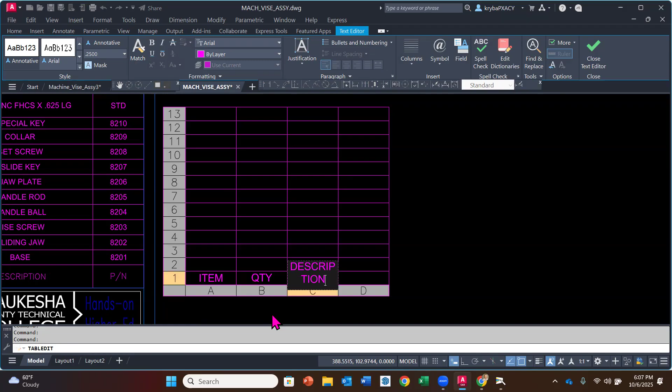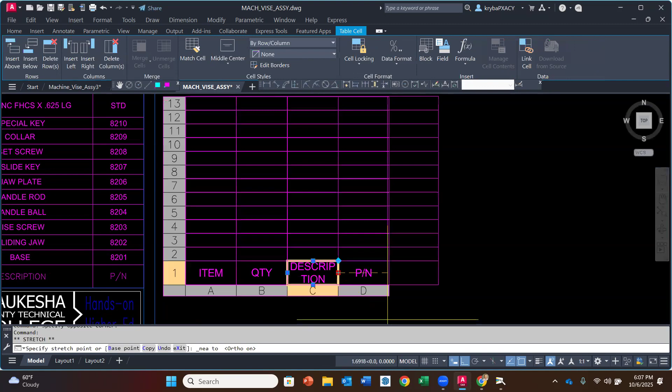Okay. And then down at the bottom here, you start at the bottom, and this is going to be our item. Oopsie, all caps, remember. And then our next one is going to be quantity, description, and P/N for part number. Now we need to make this one a little wider. How do I do that? I think I grab this like a grip, shift right mouse button, go nearest, make sure that I have my ortho on, and there we go, so that the description is wider.

And then we're going to go up, and you're going to notice that the item is going to correspond to the balloons, okay? The quantity for however many we need. The description is going to be the name. So you have each one of those here. And then I assigned random part numbers. You don't have to worry about adding these to your thing. I didn't worry about that when we did the individual parts, but just to have part numbers in here. And then the last two, you'll notice say standard, because they're standard hardware.

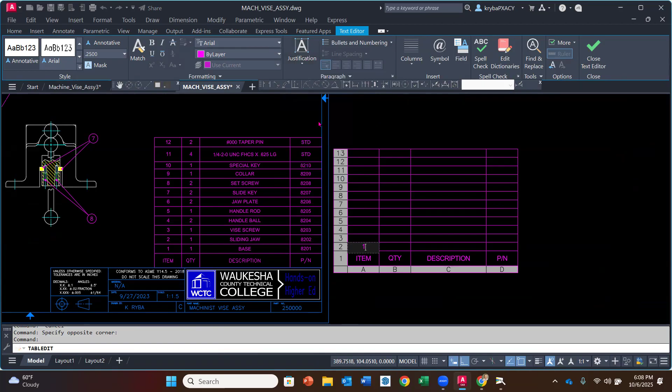Okay, so if you remember how to fill this in, just double click on the item. One, if it's a number, it's going to want to right or left justify. So we want to switch that to middle center justify. Oops. Double click here, justify. Don't I want middle center? There we go. Anytime you have a number, you're going to want to use that middle justify. If you're using letters like a description, it stays in the center, but everything else but the description you have to change that justification. And then you're going to fill that in, and place it just above the title block.

So I know I'm kind of throwing stuff at you. Are there any questions right now? This hopefully gives you a good overview of the process: how to pull those things in, a review of pulling the blocks in, removing the borders, dimensions, adding balloons, adding our bill of material. Actually, I had notes. I want to make sure that I cover the things that I was thinking about. Do you guys have any questions at the moment? Section. Slide key. Yeah, I think I hit everything.

Okay. Let me check the chat box just to be sure. Doesn't look like there's any questions. Then I am going to let you guys work. If you're still working on the individual parts, totally fine, that's where I expect you to be. As you get to the point where you're ready to do the assembly, you can refer back to this, or at least you've gotten a good overview of what to expect. And you also have the drawing guides to compare to your final. I'm here to answer any questions. The next time we get together, I'll go over an overview again, make sure we're all on the same page, see if anybody has additional questions, and then let you continue to work.